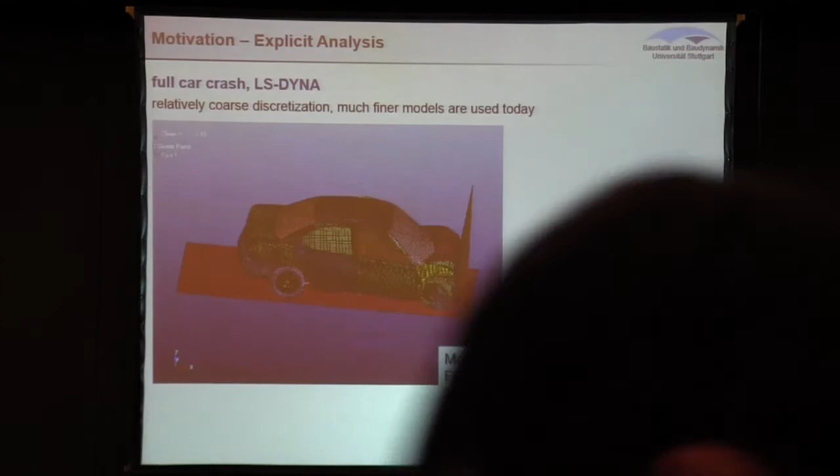So just as a motivation, look at this full car crash. It's actually a very coarse car model, so in industrial applications today people are using finer meshes, but this is just computed on a desktop machine, so the model size is not very big. The element size of the shell elements is about 5 millimeters. It's run with a time step of 1 microsecond, and the overall duration of the crash is about 150 milliseconds, and this is 12 hours on one node with 4 cores.

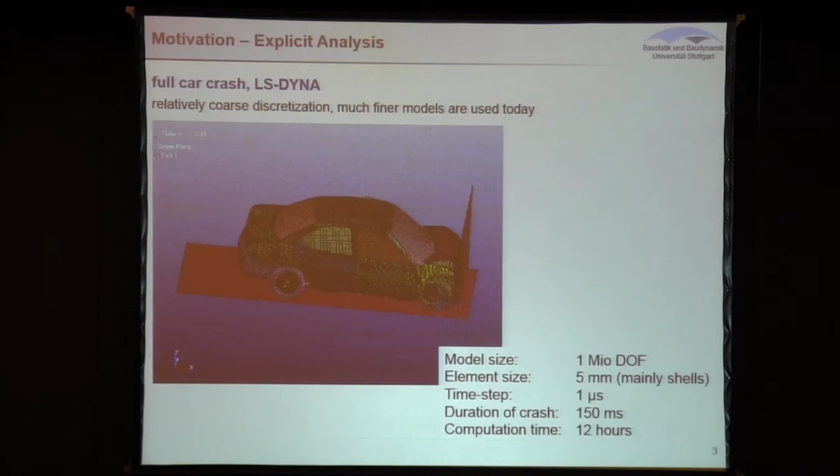And in order to understand where all the computer time goes, we looked at the first 40 milliseconds of the crash, and we see that some 70% of the clock time, but also the CPU time, goes into element processes, and another vast amount goes into the contact algorithms. So this is where we spend a lot of time. When we think of speed up of those processes, there's the possibility to find better elements, so we can use coarser meshes or have, for a given mesh, better accuracy or faster implementation of a given element. But this is already rather efficient in LS-DYNA. Of course, you could also think of speeding up the process of detecting contact and so on.

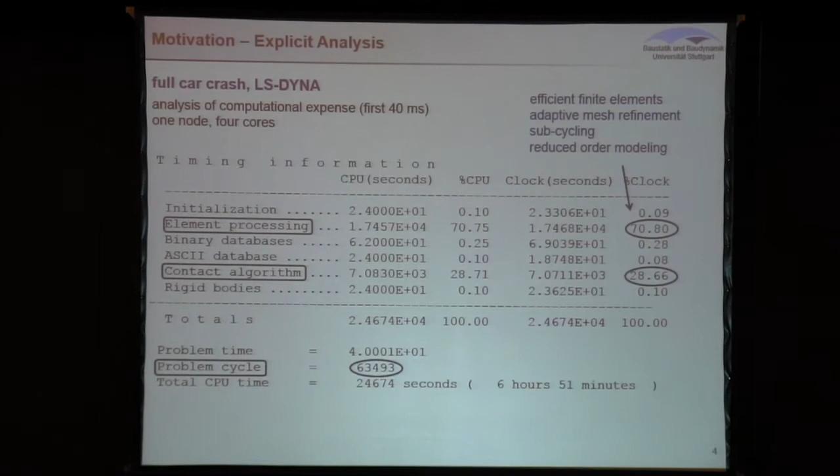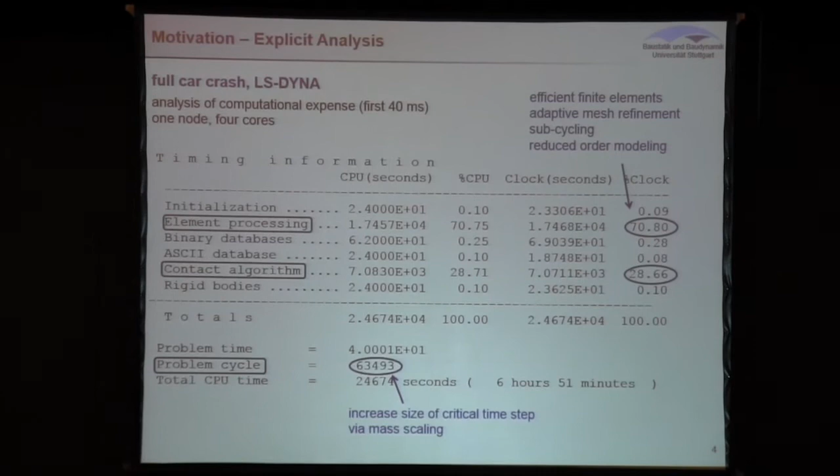But there's another circle here, which is the overall cycles. And they, of course, depend on the time step. So there's a certain potential in increasing the critical time step, and this can be done by mass scaling. And this is routinely done in industry, perhaps not so much in crash analysis, but more in metal forming, so in applications where the inertia is not so important. So for this fast short-time dynamics, it's rather demanding to find mass scaling schemes that actually pay off. So that's one of the challenges here.

Well, here's another picture of an impact. That's a little bit more of a soft impact, at least I hope for this guy here. And I'm talking about implicit time integration, so it's a totally different thing. I'm talking about implicit analysis. Usually we are not doing that when we are doing crash analysis, but it's also doable. Okay, and what we expect is that upon the transition of the energies, before there was some kinetic energy, now there's more potential energy in the deformation of the two contacting bodies.

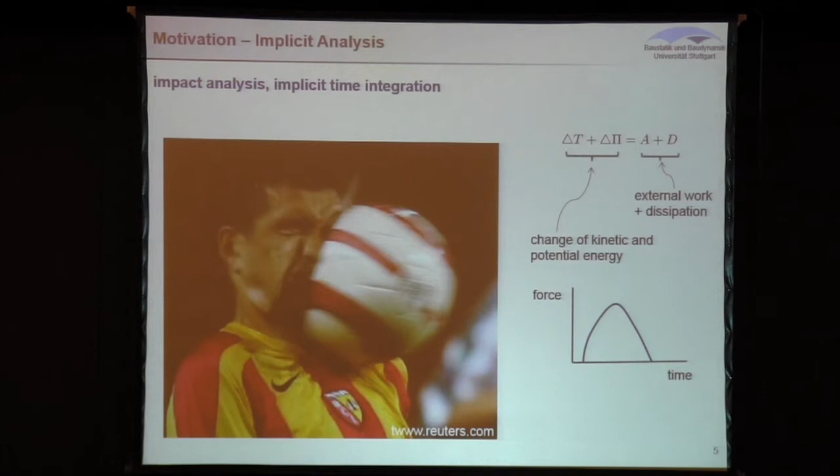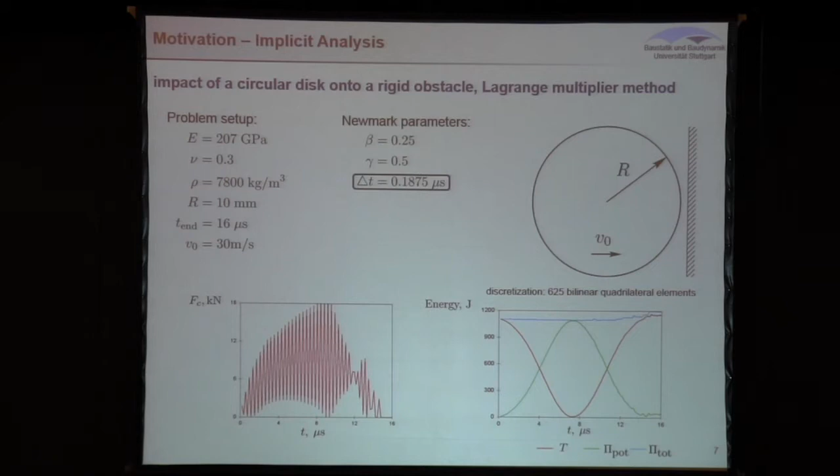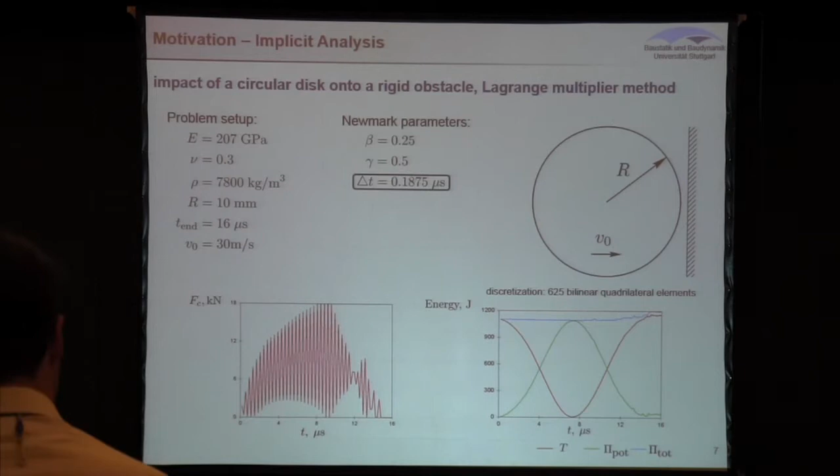And this comes from the fact that usually the surface of the three-dimensional structure, or this line of the two-dimensional structure, really has zero mass. The surface itself is 1 dimension less than the actual structure. But in the discrete setting, it does not have zero mass because there are discrete masses on the surface. They produce this problem. It doesn't go away with improved discretization in time.

So as I said, there are 2 seemingly separate things, one of them being explicit dynamics, for instance, crash analysis, but that's not the only application for explicit dynamics, of course. And we want to reduce the CPU time, we want to be more efficient. And there's a couple of strategies that you can follow in order to do that, but we are going to mass scaling, or more precisely selective mass scaling.

And the other story is implicit dynamics and the effect of oscillating forces, and perhaps you want to see something like this blue line, which is kind of smooth, and there is a lot of work in the literature on achieving that. For instance, index reduction of the differential algebraic system by solving some surrogate problem, or some regularization procedures, playing tricks on the time discretization, and so on. But what we are going to do is look into an alternative discretization using singular mass matrices in order to solve this problem.

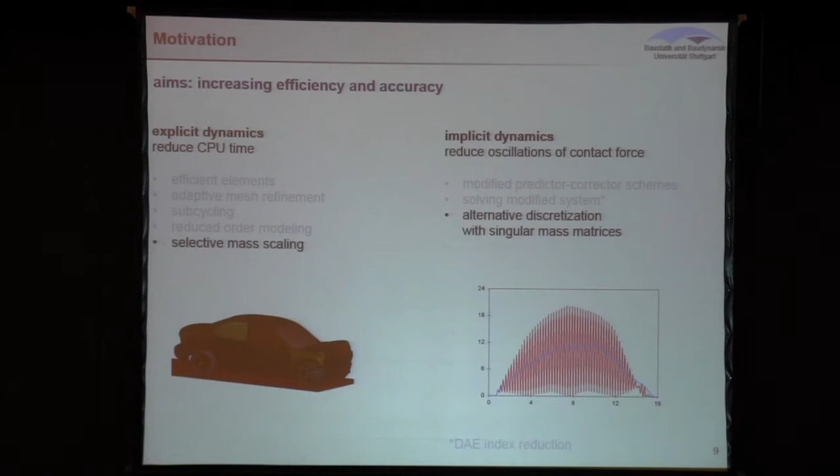And in both cases, we are working with different mass matrices. In Germany, we have a saying for doing 2 different things with just 1 step, it's zwei Fliegen mit einer Klappe schlagen, in English it would be killing 2 birds with 1 stone, and we'll see if we are able to do that.

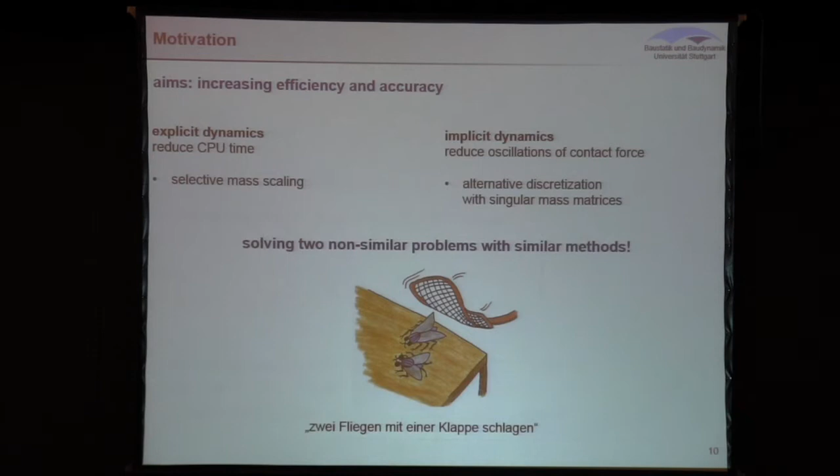So how does mass scaling work? What's the idea of mass scaling? First of all, it's very simple. If you add mass, you increase the inertia, thus you reduce the frequencies, and we know that the critical time step depends on the frequency. If you reduce the frequency, the critical time step is larger. It's very simple. Of course, it's a brutal method, because if you just add mass everywhere, the overall spectrum is more or less wrong, so all the frequencies are too small.

So you see here the relation of the frequency of the modified system to the original frequency, plotted versus the mode number. It's just a schematic sketch here. You're reducing all those frequencies. So this is why this blunt method of mass scaling is usually just applied to a small number of selected stiff elements, because it's only the one largest frequency that drives the critical time step.

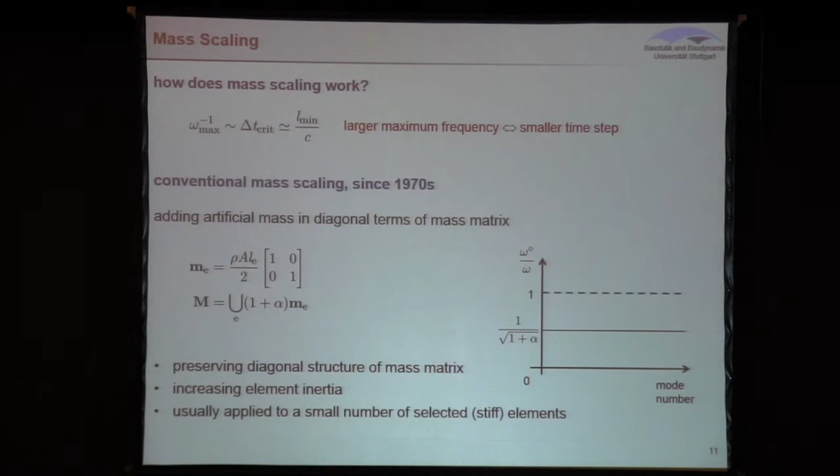So it's more intelligent to do something that's called selective mass scaling, where you're not adding mass everywhere, but just increasing the inertia of selected modes, predominantly the higher modes. So you keep, to a certain extent, the accuracy of the low modes, which are perhaps the important ones. Of course, this depends on the application, and reducing the frequencies of the higher modes. And thus you can retain accuracy and still gain efficiency.

If you do it in this type of setting, in an algebraic setting, you see that the mass matrix is obtaining off-diagonal terms, and those off-diagonal terms, of course, produce an overhead in the computational costs, so it's a trade-off. You may have larger time steps, but computational costs may even increase because the individual steps are more expensive, so we have to take that into account.

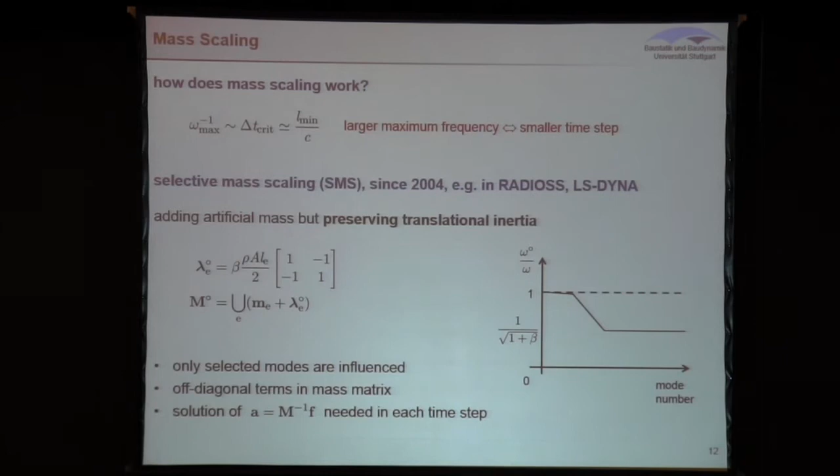Okay, so what's the history of this selective mass scaling business? Just mentioning a couple of landmark contributions, so I'm not going to read all that to you, but there's a couple of people who have substantially contributed. Most of all of them in a couple of papers, so you see how it started somewhere in 2004. So I'm talking about selective mass scaling here.

Okay, so the range of applications is not only car crash, as I said, but of course the metal forming; it is also sometimes used for biomechanics or in models where due to some geometric detailing you have some very large frequencies in small geometric details of those models.

So let's look into an example of mass scaling, just a standard plane stress element. And if you use lumped mass matrices, you just have a diagonal matrix. Very nice, very easy to invert. And now if you want to do some mass scaling in order to increase the critical time step, what you can do is you're adding something that looks like that.

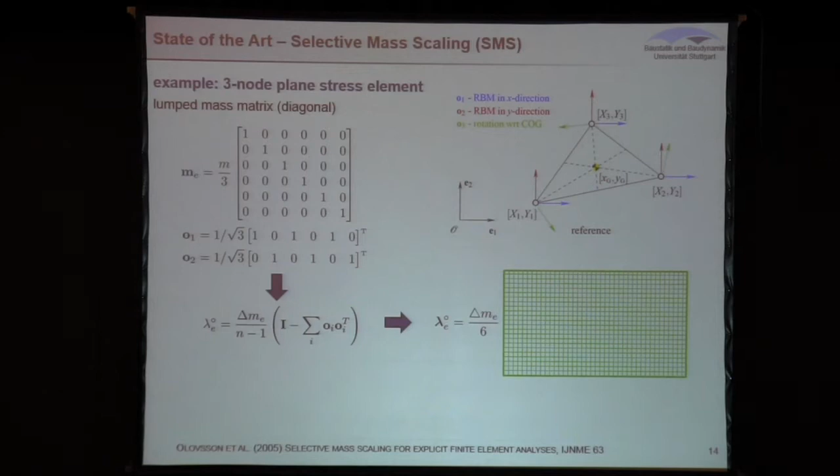So this additional mass matrix that we use for mass scaling in this algebraic selective mass scaling looks like that. And you see the rows, they add up to 0, so there's not really mass added, so the inertia is preserved. So this is for the blue ones, the horizontal ones. This is for the red ones. And the green ones, the rotations, you don't want to see them. You get a fully packed dense matrix, but you end up with a method that retains inertia, both translational and rotational inertia.

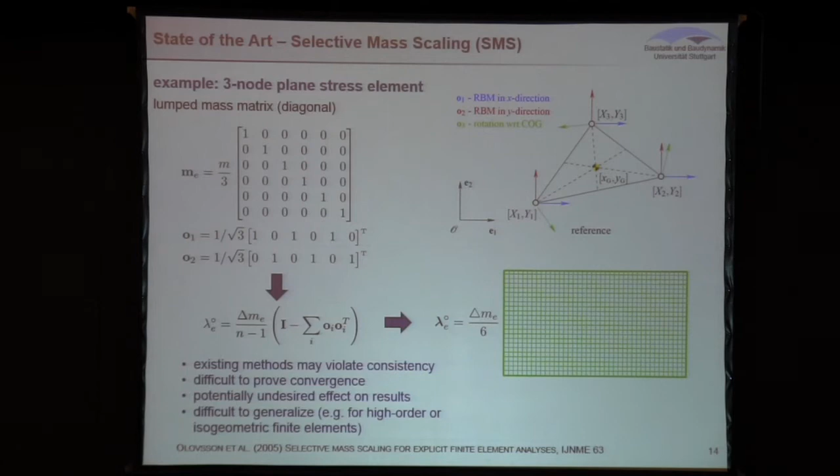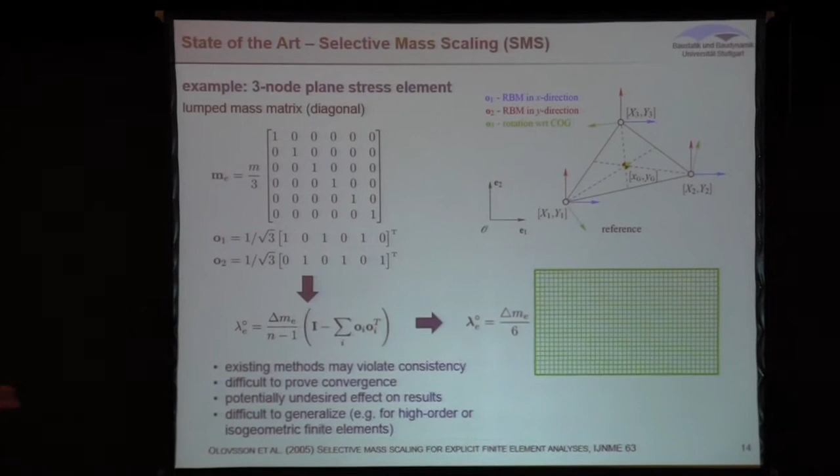So this is of course all state of the art. Existing methods that are able to accomplish that may violate consistency, pretty much because of a lack of variational consistency or variational background. It's kind of difficult to prove convergence of those methods. There might be an undesired effect on the results, so you can't really control that. They are also not obviously generalized, for instance, to higher order finite elements, other element types, shell elements, isogeometric elements; you would need a sound mathematical basis for that.

So I'm switching again. I was thinking of Monty Python before preparing this talk. You remember that guy sitting there and saying now for something completely different. So that's what comes now.

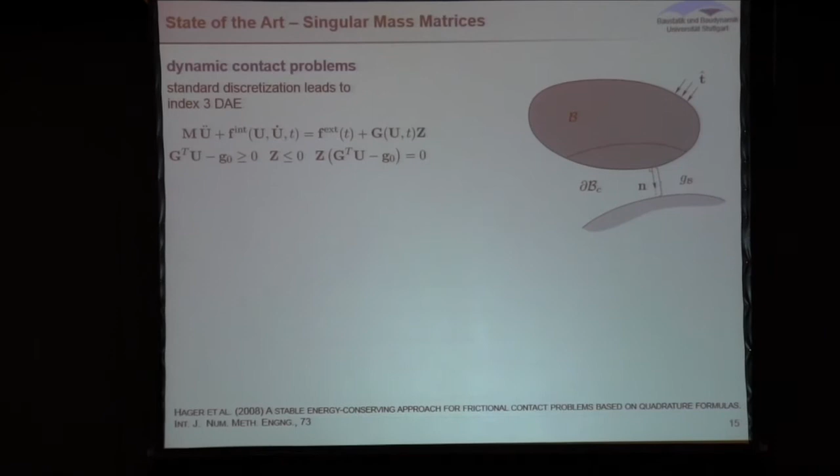So again, I'm talking about singular mass matrices and implicit analysis and the thing with the oscillations. If we're looking into a dynamic contact problem, standard discretization leads to a differential algebraic system with index 3, which is related to the fact that we have algebraic equations here in the Karush-Kuhn-Tucker conditions, but second derivatives on the displacements here. What we can do is we can somehow construct a DAE that looks like that.

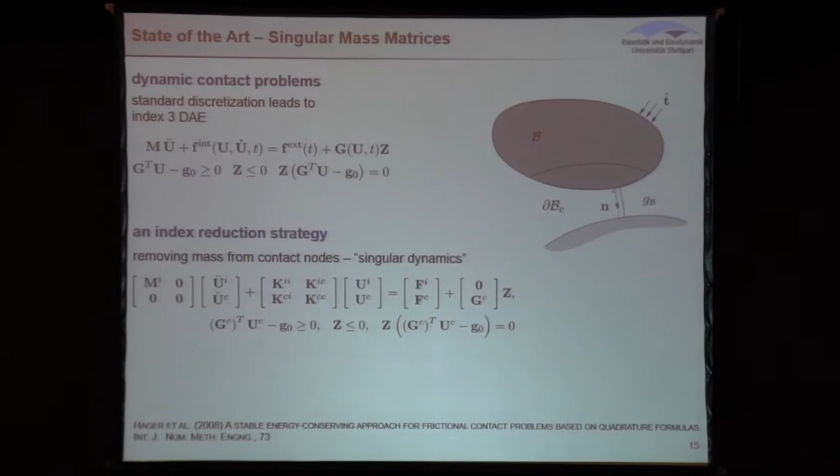The important feature is that some of the degrees of freedom here have zero mass. Okay? And it's the contact degrees of freedom. So the idea is that those degrees of freedom which are in contact have no mass. And this can be constructed in a way that it leads to an index reduction of this differential algebraic system, at least for the part that is in contact. Now, how do I reduce this to zero?

There is this very important work of Wohlmuth and their group, and the idea in 1D, for instance, is very simple. Think of the impact of a bar on a rigid obstacle. It's just a one-dimensional problem, two node elements. This one element here, you want to have no mass here and some mass here. So what you're going to observe is that as soon as there is an impact, the first node may oscillate. But we don't care, because there is no force related to the oscillations, because there is no inertia, because there's no mass. And with mesh refinement, the mistake that you're making is getting smaller and smaller.

And you can do the same thing for the two-dimensional, three-dimensional case. It's pretty much the same idea. So these are special integration techniques that produce singular element mass matrices and achieve this goal. It has a tremendous effect on the accuracy and on the oscillations in the situations that I just mentioned before.

Okay, this is very efficient for bulk structure. Well, in 1D, this is also a bulk structure, right? But for thin wall structure, it's not so easy to apply, because if you think of a thin wall structure like a shell, just getting in contact like this. So we want to move the mass away from the contact surface. Well, but the contact surface is pretty much the entire domain. So where do you move the masses? So it's not so easy for thin wall structures, but for bulk structures, this is a very good solution.

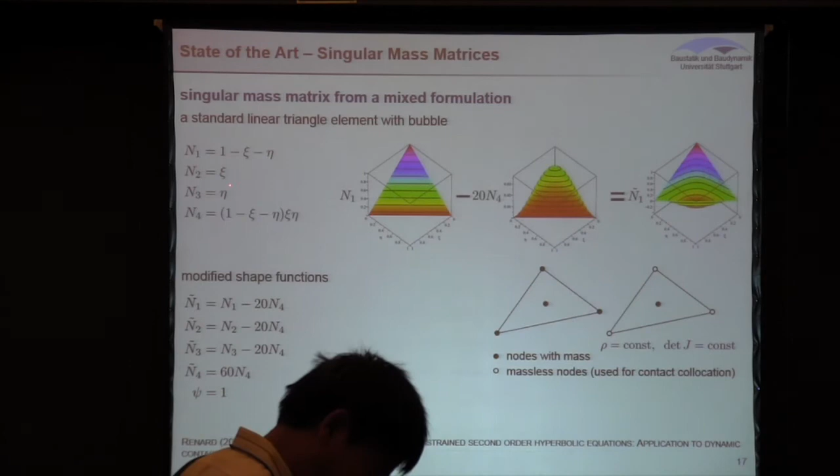So first of all, this is a formulation using shape functions for displacements and velocities. This is how shape functions look like. They're constructed, so it's a triangle element, by the standard linear shape functions plus a bubble function that's here. And well, essentially with these modified shape functions and this shape function, which is the one for the velocity, which is constant within the element, the construction is such that for this element there is only a central node, the one that belongs to a bubble function, that has mass, and all the edge nodes don't have any mass. Well, by that we can achieve the goal that I have described before.

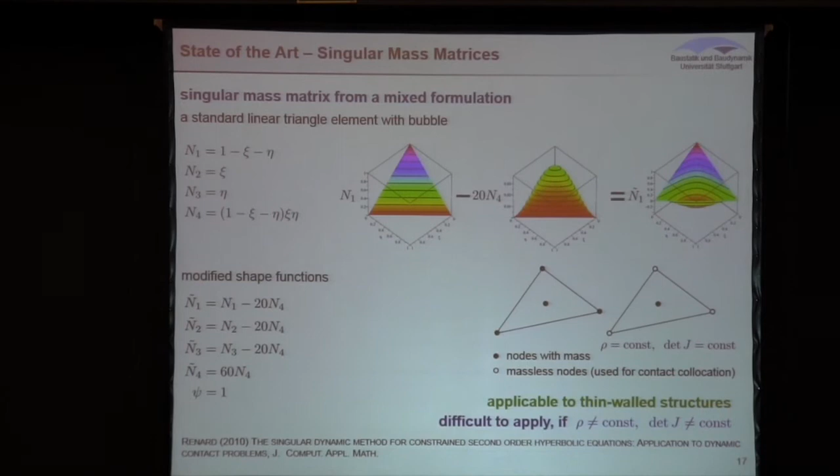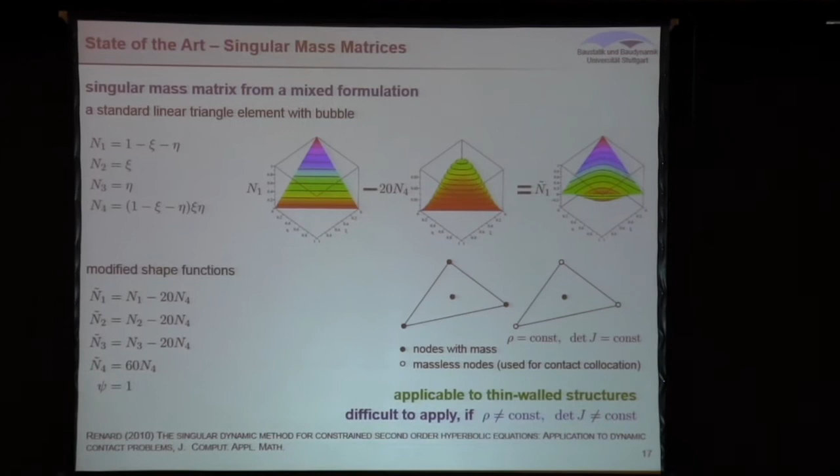So this is all, once again, state of the art. This is also applicable to a thin wall structure, so in a sense, if you think of that element crashing horizontally and vertically, there are all the edge nodes that are vibrating back and forth, but because they are not on the contact surface... Sorry, I'm explaining it the wrong way. You're collocating contact with the massless nodes, so the massless nodes get in contact, and the node that has the mass can freely vibrate. So you don't have the oscillations on the contact force because the contact force is zero here at the node that has the mass. Okay, so that much for state of the art.

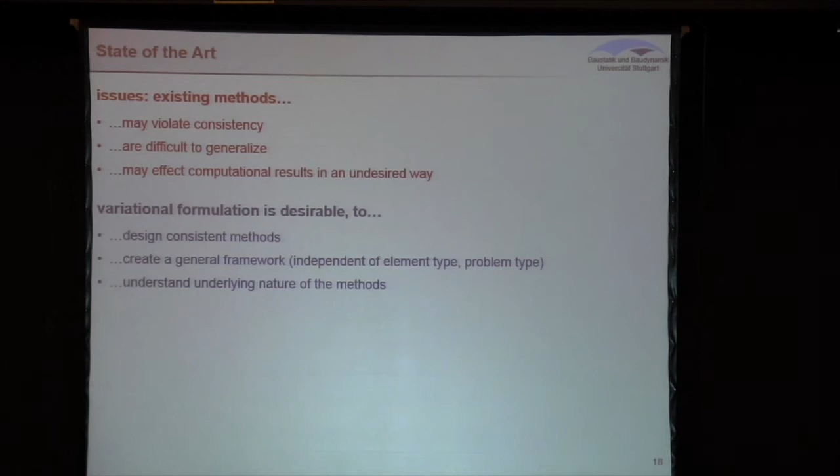So the issues of the existing methods, one of the things I said before already, is they may violate consistency. They are difficult to generalize pretty much because there's a lack of a general framework. We've seen a couple of different things like different quadrature rules, algebraic construction of different mass matrices and so on. And well, they may affect the computational results in an undesired way. So what would be desirable is to have a variational formulation for that, which is a framework which allows us to design consistent methods for anything more or less. Okay, so we are not there yet, of course.

The approach that we're proposing here relies on a multi-field variational principle, pretty much the penalized Hamilton's principle that I'm talking about next. And the independent fields are linked in the weak sense via some sort of penalty formulation. We're using shape functions and subspaces for displacement, velocities, and the momentum. And well, there are additional considerations depending on the application, whether we want to have selective mass scaling or singular mass matrices. But the framework is the same for both worlds. So these two separate worlds are kind of connected here on the method level.

Okay, now what we're doing is we're following the idea by Carlos Felippa on the level of spatial discretization for finite elements, namely this parameterized variational principle, and applying that to the Hamilton's principle. So on top of that kinetic energy, we are adding the residuals of all those equations here, like connecting the momentum with the first derivative of the displacements, or the momentum with the velocity, or the velocity with the first derivative of the displacements, and multiplying them with parameters. And the three parameters we're just choosing somehow. And this is more or less our toolbox to design whatever variational principle we would like to have.

Okay, so for the specification for selective mass scaling, we're just specifying the parameters like this. We're setting C3 to 0, so we are not using this part. And C1 is chosen to be minus C2. Okay, so I'm not explaining that, I'm just throwing that at you. The corresponding three-field formulation needs discretization, so perhaps you can memorize N as shape functions for the displacements, psi for the velocities, and chi for the momentum. This is the corresponding semi-discrete system of equations that we are getting.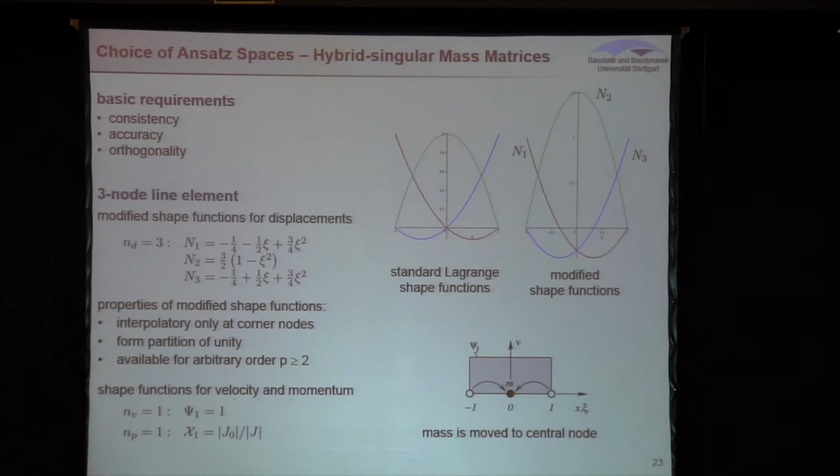So these new shape functions in combination with constant interpolations of momentum and velocity lead to a mass matrix that looks like that. So the corner masses are pretty much moved to the center node. And similarly, we construct the same thing for 2D elements. So you see a tensor product structure of the corresponding shape functions for the displacement. So we're just multiplying these two with each other. So you know that from standard elements.

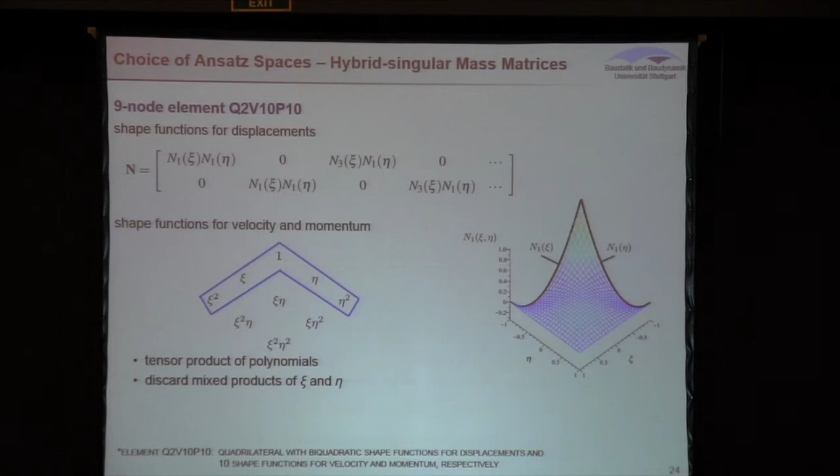And the corresponding shape functions for velocities and momentum are also computed from a tensor product structure, but we are omitting all the terms that are mixed, so we're using only those terms. So it's 5 terms for each direction, so 10 degrees of freedom for velocities and 10 degrees of freedom for momenta. That's why it's called Q2V10P10. It's a quadratic element. So that's an element I'm using in numerical examples later on.

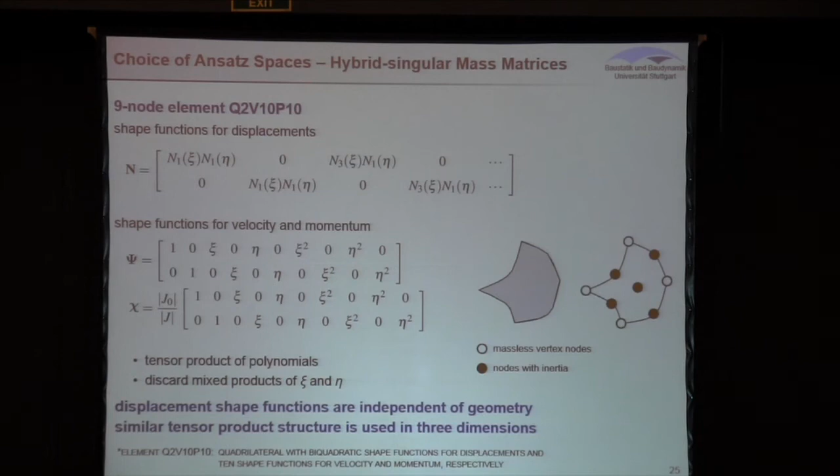So this is what these shape functions look like, and at the end of the day we get a mass distribution in this element that looks like this. You see the corner nodes are massless; these edge nodes and the central nodes, they have mass. And in the context of a contact formulation, I'm only collocating contact at those nodes that have no mass. By that, the problem with the oscillations is hopefully reduced.

So Anna Schottler is sitting here. She'll talk about this a little bit on Friday, but also with more formulations and more applications.

So let's look into numerical examples in order to find out whether this framework has the corresponding benefits or suffers from the potential limitations that we might have. So the benefits we expect for singular mass matrices are that they remove oscillations during impact, that they might somehow improve the energy conservation, and that it's also applicable to thin-walled structures.

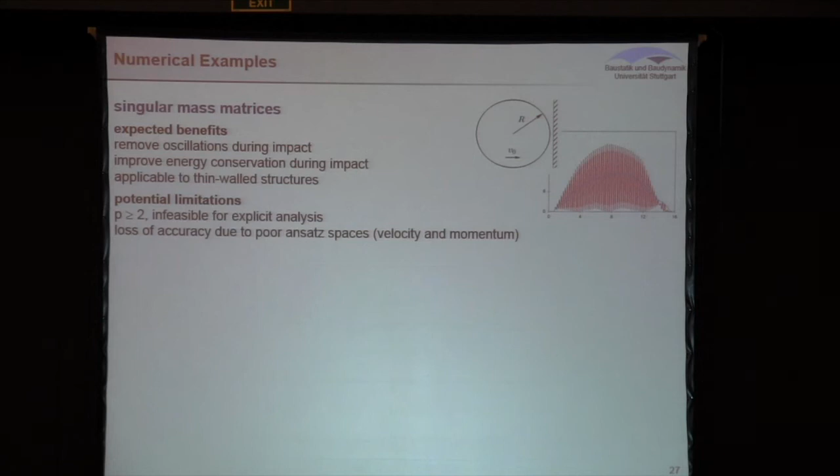Potential limitations, of course, are, well, this is not really potential, we know: we need at least P equal to 2 for the displacements. It's infeasible for explicit analysis because the mass matrix is singular. Okay, so you cannot invert it, and that's a pretty obvious limitation. What could happen is that we lose too much accuracy because of the poor ansatz spaces, and at the end of the day it's not acceptable. But this is really a little bit application dependent.

So let me start with a numerical example. So this is just a simple beam, and we apply this velocity profile as an initial velocity, and then at a certain distance there's an obstacle. Actually, this distance is really small here because we're doing linear analysis. So there's a nearby obstacle, and I'm hitting this beam against the obstacle.

And well, using a consistent mass matrix, this red one is the force response that I get using a standard Newmark scheme. And using the hybrid singular mass matrix, the blue one is the response. So it's force versus time, and you see all the oscillations are gone.

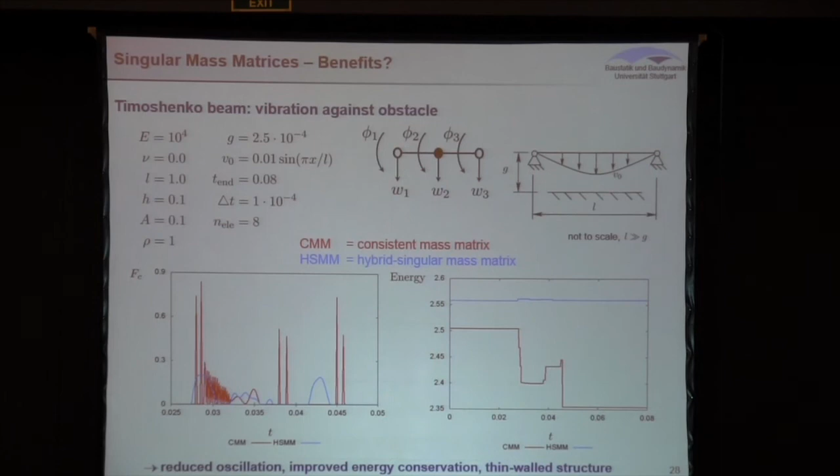On the right-hand side, you see the development of energy during this whole process, and while we're losing energy, well, energy is more or less preserved for this hybrid singular mass matrix. Once again, this is a stupid time integration scheme, not taking into account the contact event. Of course, you can obtain similar things, playing tricks.

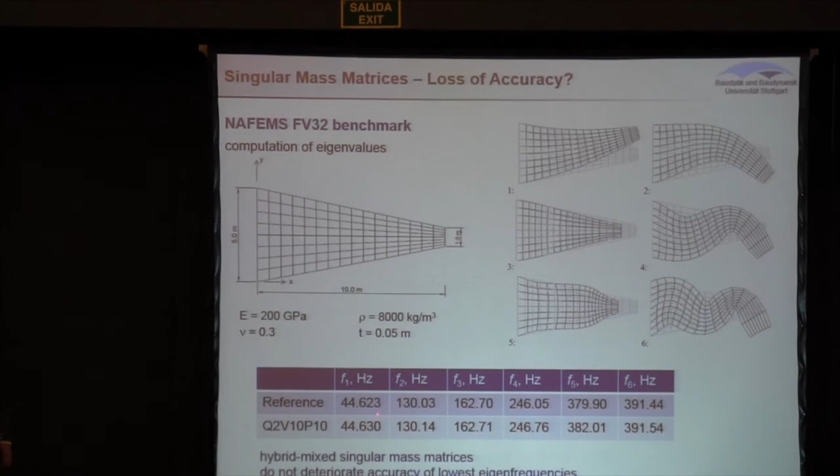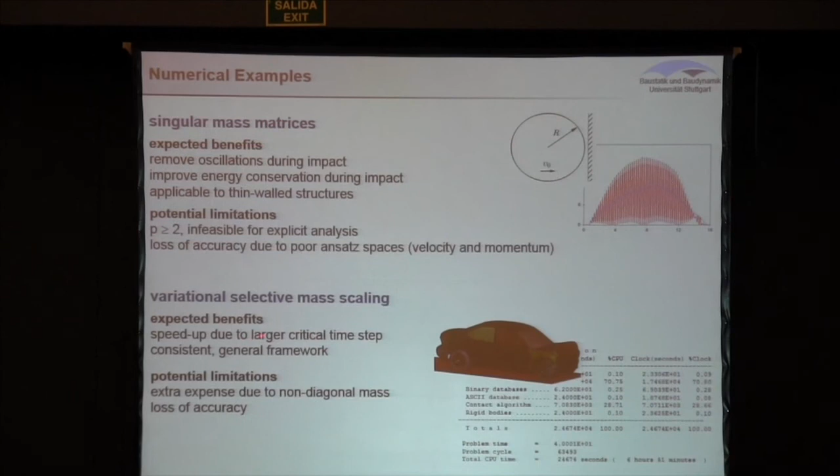That's the second story. So the expected benefits are speed up, and the other benefit is more a theoretical one, the philosophical one. We have a consistent general framework, and from that we hope that we can expect much more in terms of development. So this is of course not a benefit. I can check this with the examples.

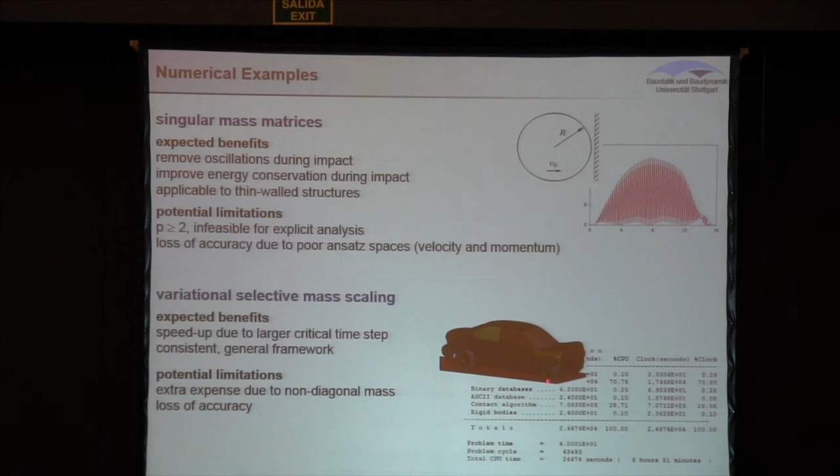Potential limitations are we have this extra expense due to the non-diagonal mass matrix. So we have to solve a system of equations. It's no longer diagonal, so it's no longer trivial to invert the mass matrix as when using lumped mass. And we may have a too strong loss of accuracy. So for crash simulations, for instance, this could really kill all the benefits, override them.

In order to have an estimate for speed up, I'm looking at this algorithm here, so I'm not reading the whole algorithm to you. That's the one as you find it in Belytschko's book. And there's a couple of things where selective mass scaling comes in. That's also true for algebraic selective mass scaling. So first of all, you have to compute it. And well, you have to do this inversion. Well, in the first step, but this is what you're doing through the entire loop.

And this is really the tremendous cost here, expense, if this elimination is expensive, if this takes some time. And there's another thing, these two terms on the right-hand side, VBCs for velocity boundary conditions, that come into play, but it's really this part which is the most important one. So you have to solve some equations which you usually don't do if you do explicit analysis.

And so the speed up can roughly be estimated in this manner. So it's pretty much, first of all, the ratio of the time step that you have with selective mass scaling compared to the time step that you would have with lumped mass matrix, times some term which depends on the time you need for the solver and the element. So you see, if you spend all the time in the solver, this is expensive. You have a bad solver, then the benefit is going to be killed.

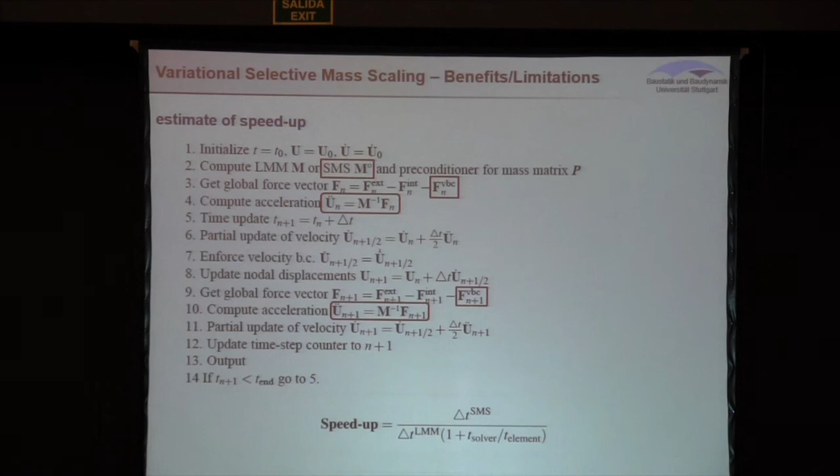But if this is done efficiently or massively parallel or very, very optimized, then the element assembly time is dominant, and then really the speed up is more or less proportional to the decrease in time step. And that's, of course, the perfect situation.

So what you see here for this benchmark that I've shown before is, again, the spectra, and I'm comparing here the omega, so the frequency that we get for the scaled mass matrix in comparison to the lumped mass matrix, not to the exact one, because that's what you usually do when you do explicit analysis. And so this is what you get. So you see for small frequencies, we get the same result, and for large frequencies, we have a reduction.

So this reduction here, if it gets larger, if I increase this constant, that means for larger constants, we have larger time steps, so we have more efficiency, but we're losing accuracy because the spectrum is getting worse and worse.

If you compare that to algebraic mass scaling, like published by Olovsson, still we're looking a little bit better here. So let's say if you take beta equal to 0.5, that's roughly what we get with C1 equal to 10, it's two different parameters. So the maximum frequency is more or less the same, but the spectrum, the black one, is much better than the red one because it's closer to the reference in a wide spectrum. So that's what's to be read from this chart here.

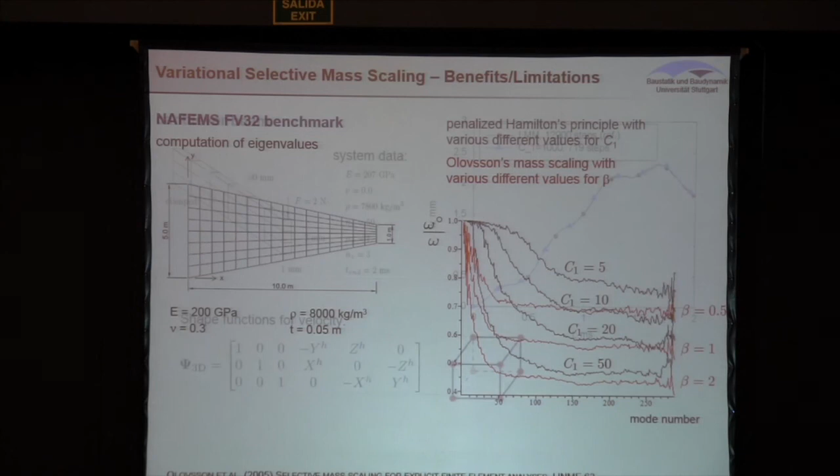Looking at results of transient analysis, this is again a simple benchmark, it's just a beam with a sudden force here. And as a reference, we take computation with the lumped mass matrix using roughly 13,000 time steps, and with a C1 of 1,000, so a rather high constant, so we are significantly increasing the critical time step. We are able to complete the same thing with 719 steps, and we get pretty much the same result.

So if you use algebraic mass scaling and Olovsson's method, trying to get the same step size, you can do that. You need beta equal to 1,000, and it's more or less the same, 1,100 or 700, I don't care. But you lose a lot more accuracy. Okay, so that's the deal here. That's it. I don't know how general this remark already is.

For instance, one thing that we have to say here is that here the low order modes are dominant. So if the very left part of your spectrum is good, then you can already solve this problem. For a problem which is more complex, or where the higher modes are more important, well, it may be not so good.

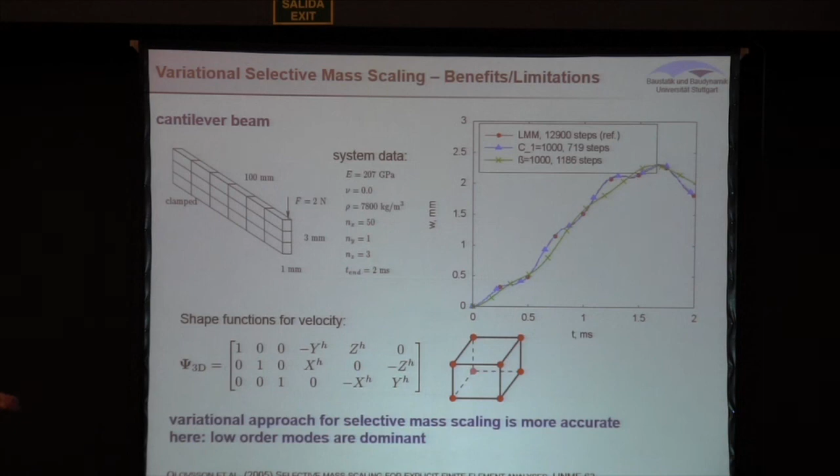Okay, well, this more or less concludes my talk, so I don't know if these two guys are really, if we really got them, or if we accidentally opened the window and other flies are coming in.

So we're just in the course of learning that and applying that to different discretizations, applications, and so on. But for singular mass matrices, we really found that these benefits are there. There's an incremental increase in removing the oscillations. And of course, there are limitations. I mentioned them a couple of times, and really this depends on the application. And for selective mass scaling, it's pretty much the same. The benefits are really there.

We have this speed up, but at what cost concerning the accuracy and the time for solving the underlying system, because the mass matrix is no longer diagonal. That really depends on the application. So also here, whether the benefits outweigh the limitations is application dependent. So as far as we could see, variational selective mass scaling outperforms algebraic mass scaling. So this Sunday in Hockenheim Hamilton was clearly outperformed, but here, well, at least Hamilton outperforms the algebraic version.

And I wouldn't stop without giving some ideas of what could come next. Of course, extension to nonlinearities and stuff like that, that's quite obvious. But we want to further analyze also what's behind that penalized Hamilton's principle, look into alternative discretizations, applications; non-uniform choice of mass scaling is something I didn't touch here. So up to now, in these numerical examples, I've just applied mass scaling to all the elements, which is of course stupid. So you can be much better if you just do mass scaling for a couple of selected elements, that's obvious.